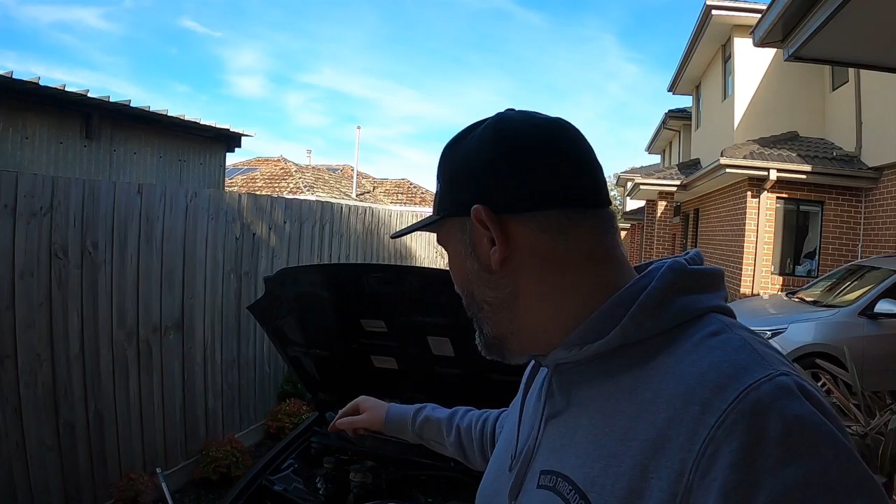Since we last saw the car, the owners had it for a whole week. We've had to bring the car back once already to do some mods, and these ones weren't good mods. We had to replace all of the fittings from the oil filter and also to the turbo because all of those cheap fittings were leaking. I'm going to show you what we did with that in just a second.

The reason why we are back is because we're going to set up a missing link, or a daisy chain of fish tank filters, to cheat the map sensor. I've heard about this several times, and heaps of people have told me just chuck a few fish tank filters in there and everything will be sweet, off you go. I actually tried that, just shoved one in the line and made a bit of a link, and it didn't work. But now, after a bit more research, I know what I need to do. I looked all over YouTube, couldn't find any decent videos, so I decided to make one.

So I've got the owner back. We've already adjusted the wastegate, got it up another full turn, so that should give us another 2, maybe 3 PSI. Hopefully our target is around about 8, maybe 9. That's what we're aiming for.

Still no tune, stock injectors, stock fuel pump. We're hoping that this missing link system, or daisy chain of fish tank filters, is going to do the job. The owner has also jimmy rigged up this really cool air intake.

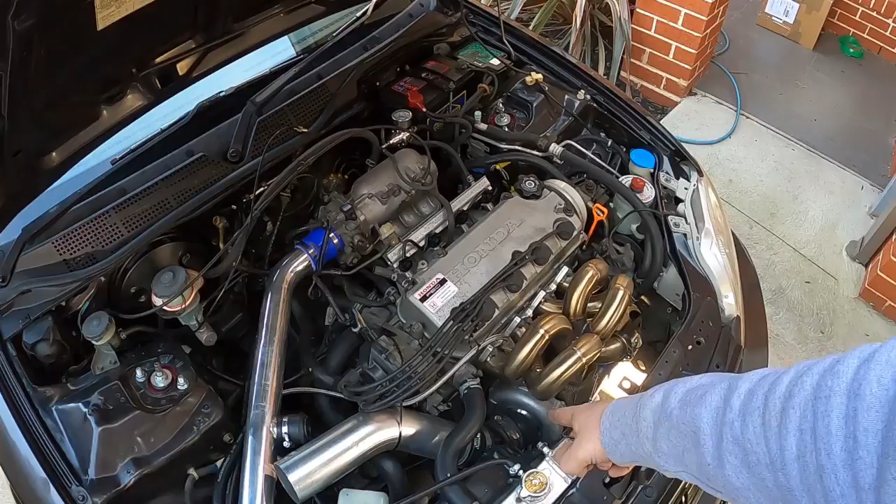As we discussed, I had to trim here and make things fit around the fan shroud, and it wasn't ideal sucking hot air straight off the radiator. The owner has put in some elbows. This is just temporary - we're going to trim this down, put a filter on there, and get another silicone elbow there soon. But just for now, we're getting some cool air from behind the headlight, which is great.

Everything else is going like a dream. So let me show you what we've got over here. Hopefully we miss all the glare and sunlight, but I've set up a little drawing here on my whiteboard.

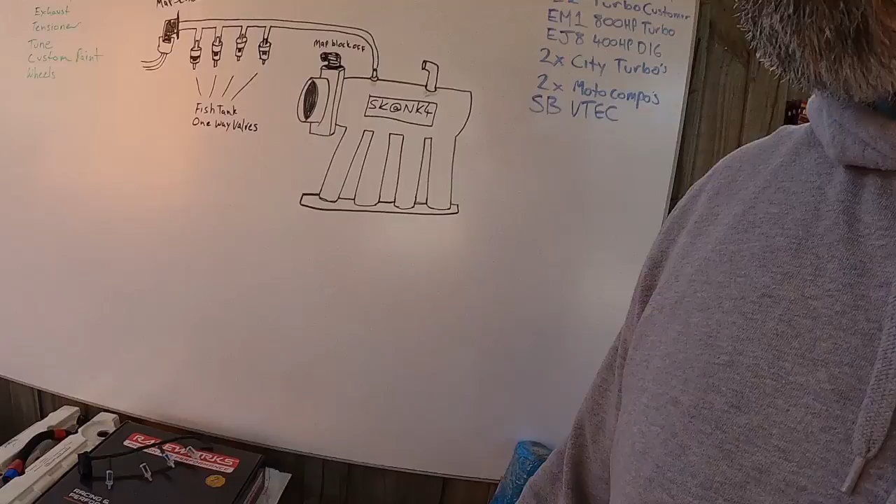Before we do that - I replaced all of the fittings. All of these China fittings were leaking. The red and black ones are the ones that came with the oil cooler setup, that we didn't end up running, but just because there was no space. We did end up using a lot of the oil lines, and every single one of those leaked. The Max Speeding rod fittings didn't leak, but we decided to change them all out for some Raceworks ones.

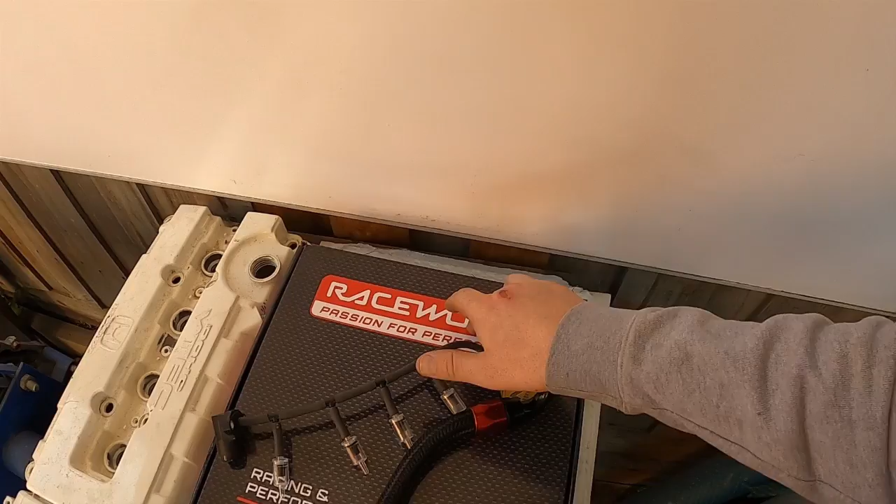They're local down here in Melbourne, so I just went and hit those up. I went with some push lock fittings, all black, nice and stealth, so I think that was the go. Don't cheap out on fittings because you'll just have to change them all anyway. Turbos is cool, intercoolers is cool - go cheap on those, but probably not on your fittings.

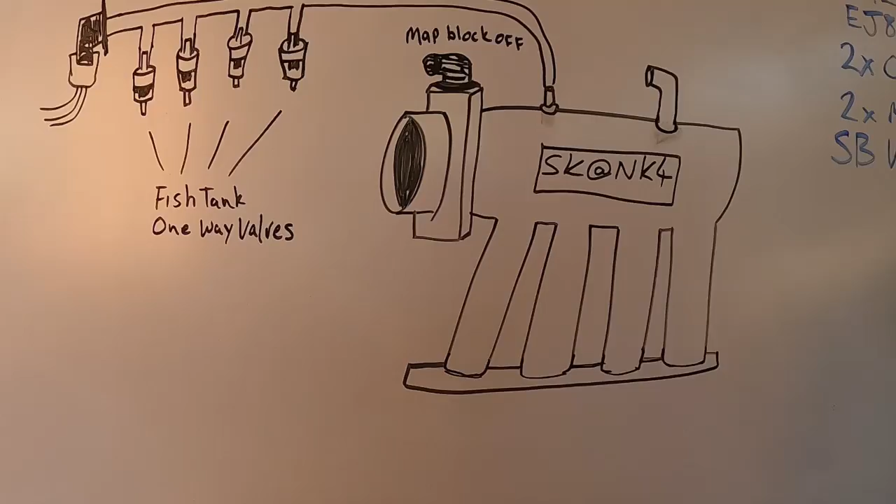Hopefully you guys can understand my drawing here. This is your intake manifold. You have tons and tons of vacuum lines coming off there - I've just drawn a couple on here. This is your brake booster line, throttle body, and your factory map sensor.

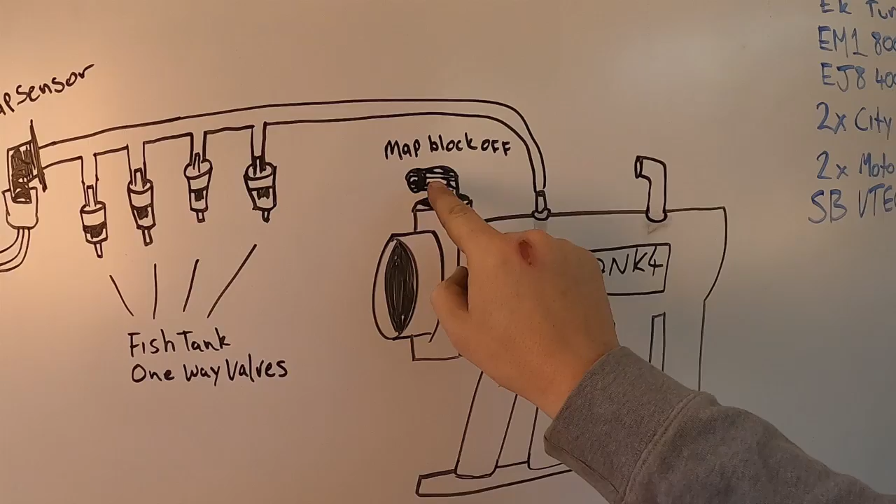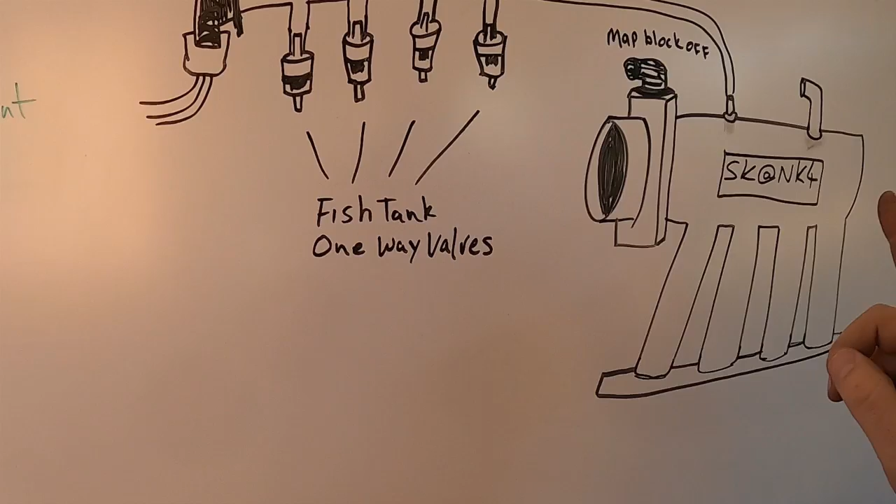What I'm told is you grab any of the extra vacuum lines and run a link off there with around about 4 of these fish tank filters. They're a one-way valve, so when the car's on vacuum, they're all sucked shut, so there's no leakage. The car won't stall, in theory, which we're going to test.

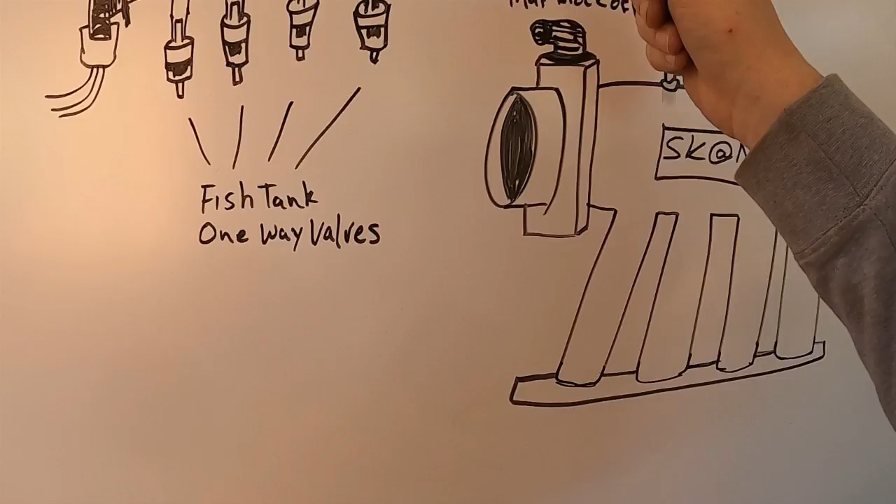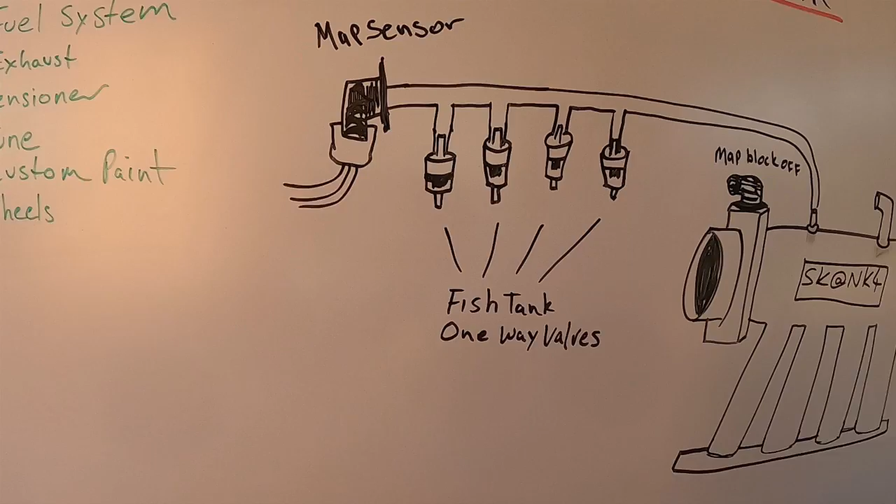Then under boost, the boosted air comes in here, fills up the plenum, and then any excess is going to push out through here to go talk to the map sensor. On the way past, it's going to bleed out some of this extra boosted air. Hopefully by the time it gets to the map sensor, we're reading very little to no boost, and everything stays fine - no engine lights, the car doesn't break up, and we keep running smooth and sweetly.

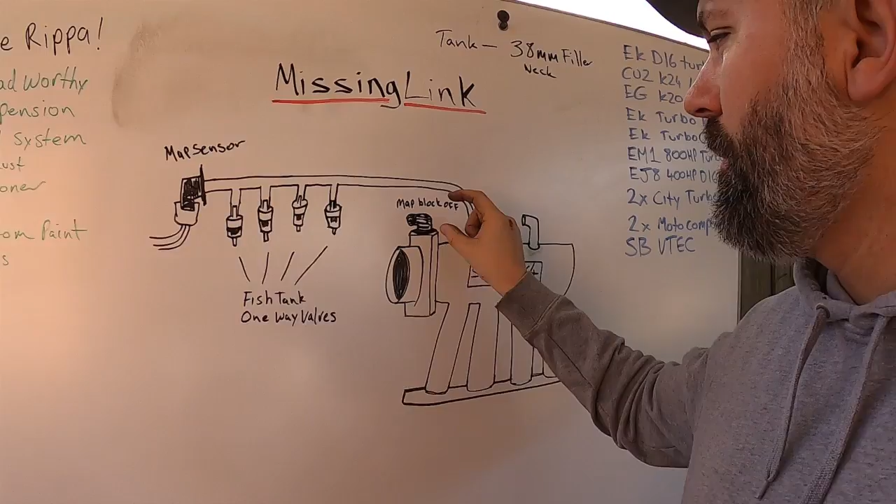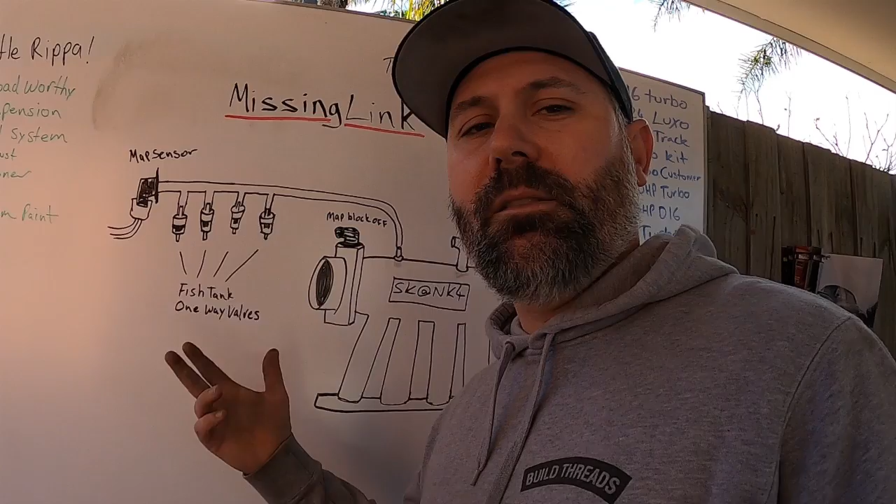Now there is a device you can buy called a missing link. Basically it's a spacer that goes between your factory map sensor here - it's really nice and neat. Those cost around $100, whereas these cost around $5, so that's a no-brainer, at least to give it a try. This is what it looks like once you're done - a vacuum line off the plenum, your one-way valves, and then your map sensor. So we're going to go and install that on the car.

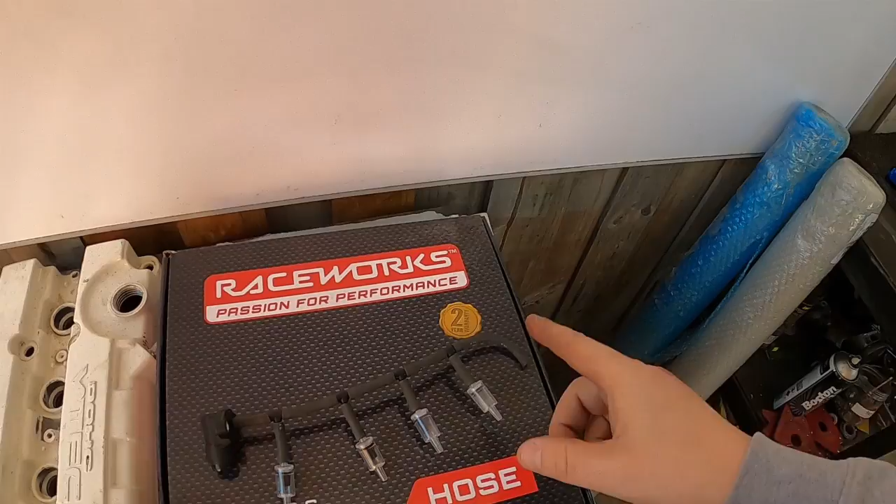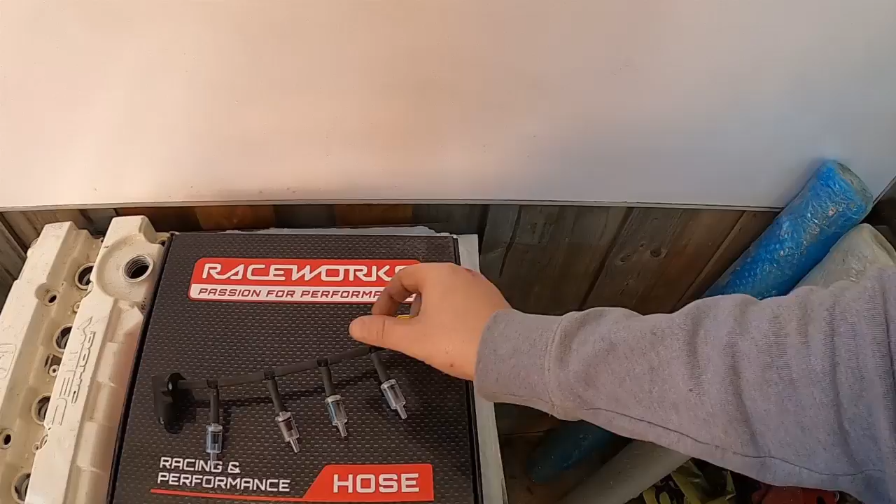Should be really simple, just a matter of unplugging the map sensor that's there and plugging into this spare one that I have, or you could make a blanking plate and just blank that off, and then simply plug that in, and off you go.

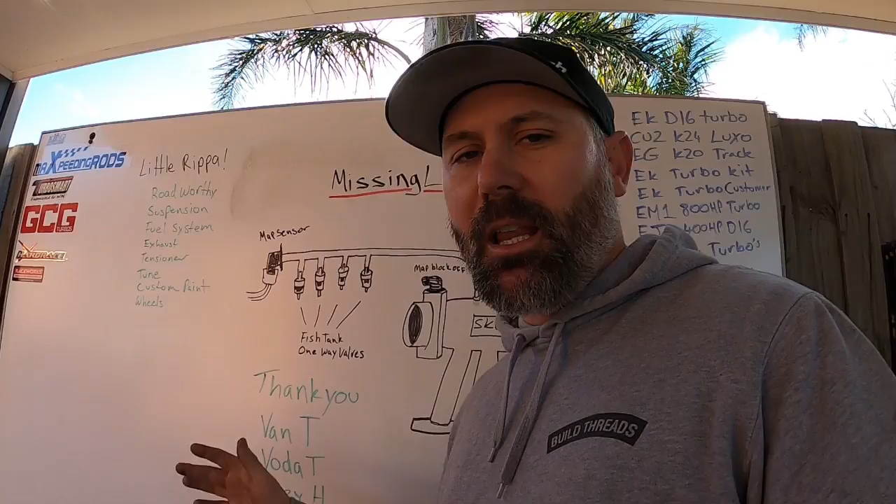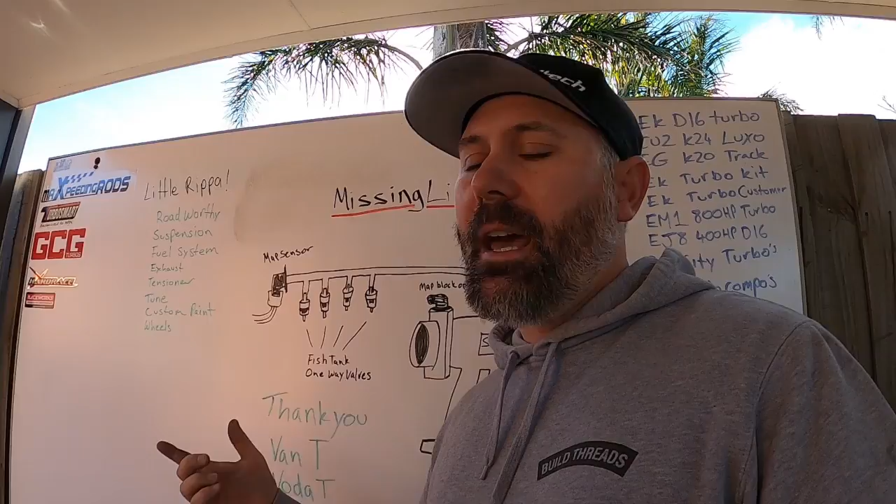Between the three guys, we got some great tips. I actually learnt that Evo 4, 5, 6, 7, 8, 9, and 10 injectors, according to these guys, clip in and run fine on the factory ECU and all the factory plugs. That's something I need to investigate myself, but I'll take their word for it because they've been good with all the other info in the past.

So that'll help you go from a 190cc injector to a 410, I think they said they were. That's perfect for what we're doing.

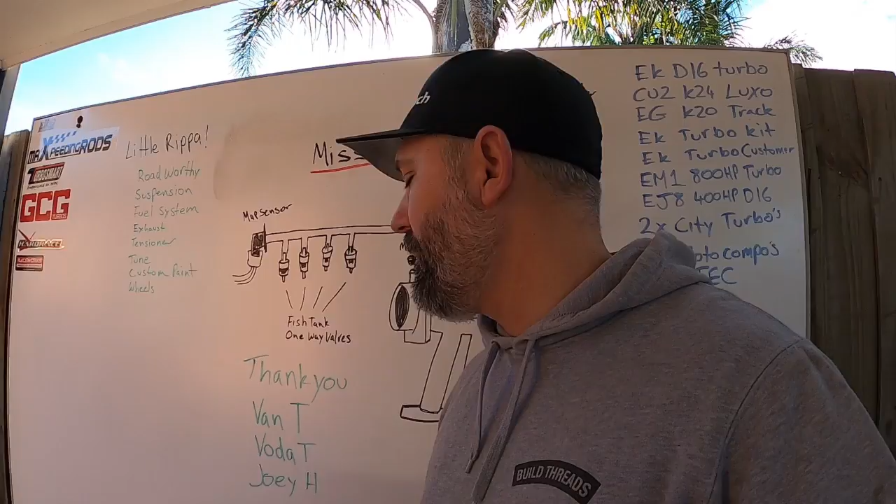All three of these guys said that they are running the missing link setup just like this, and around about 9 or 10 PSI on their cars with no tune. Everything's all factory. One of the guys upgraded to Evo injectors, so 410cc injectors.

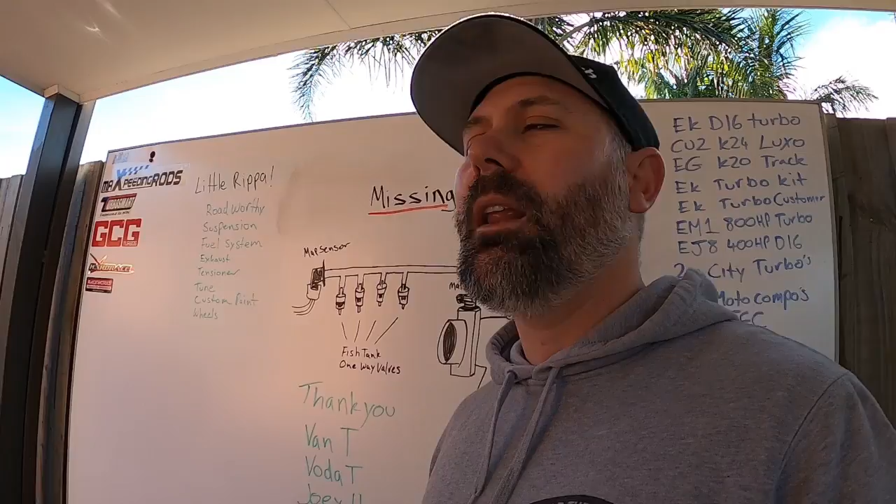I believe one of the guys also put in an Apexi SAFC, and that is Super Air Fuel Controller. So that can just tell the injectors to put more fuel in versus the air fuel ratio and the RPM. Pretty good little cheat.

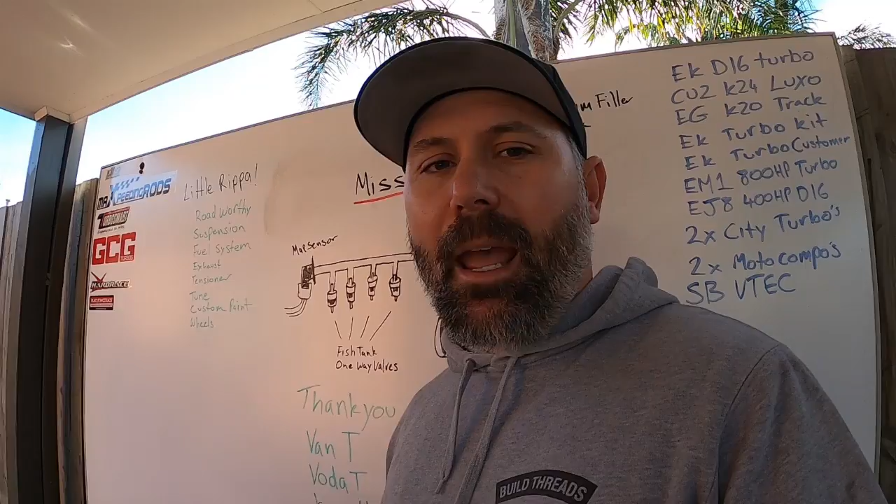They're still not cheap. Last time I bought one of those was about $600 a couple of years ago, and then you've got to get it installed and tuned. Maybe if you can pick one up secondhand cheap, might be a good budget option. However, if you're going to go $600, you may as well go $1,000, and you may as well do an ECU upgrade and totally program everything.

I don't know, that's just my 2 cents, but let's go over to the car and we're going to set this up now.

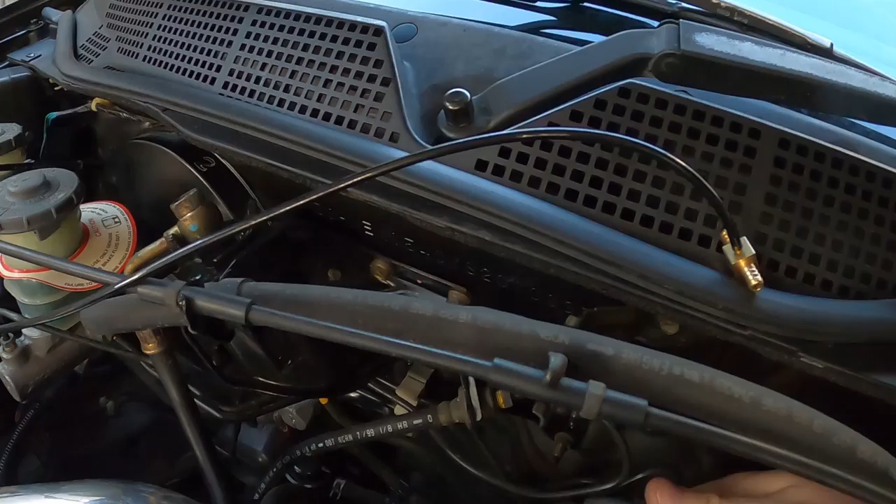Really simple, so it's just going to be a matter of reaching back down here, plugging that into a vacuum line, pressing that down, and we'll cable tie this all up soon, but we'll just leave this here for now. Then unplug the factory map sensor, plug it into the other one. Sorry about the camera angles, doing that with one hand.

We're going to go take it for a drive now and check out what sort of boost it makes and how the car drives. Hopefully that's problem solved.

Alright, so first test, we've given it a little tiny squirt so far and hit 5 PSI and held, so that was good, no breakup. Now we're going onto the freeway again, second gear. It's pulling very strong, but we're not really getting more than 5 PSI yet.

I don't know why that is. It could be because maybe it's bleeding air out, I don't know, but yeah, very strange. It's definitely going harder, and it runs smoother, so that's a good thing.

So we're in 4th gear, it's running about 3 PSI now. Obviously the turbo is not spinning as fast, but yeah, goes strong, goes good, pulls well.

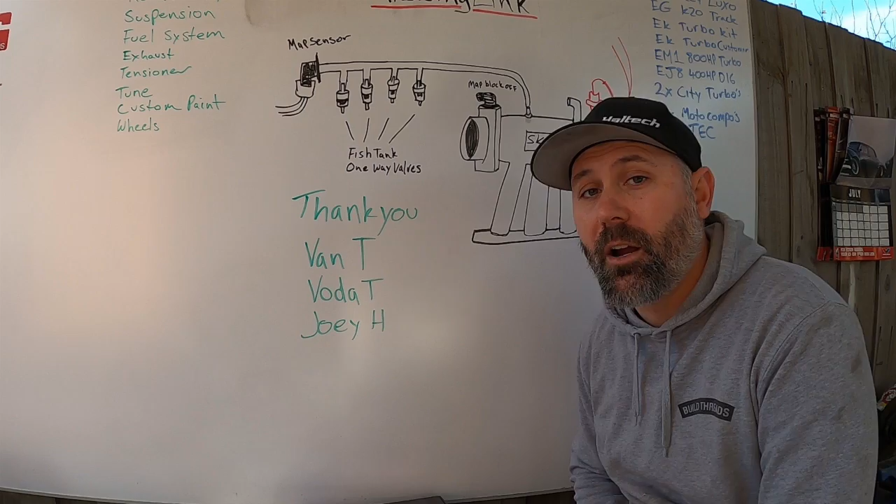Now, I did gap the spark plugs down to 0.8, which helps. But what I did is I ended up taking another vacuum line from here that was going onto my fuel pressure reg, and I put a T-piece in the line, and that's where I ran my boost gauge. Vacuum line through here, and then that goes off to my fuel pressure reg. What do they look like? They look like that. So that's where I got the vacuum signal from, and we're actually running 8 PSI comfortably now with no tune. That worked out really, really well.

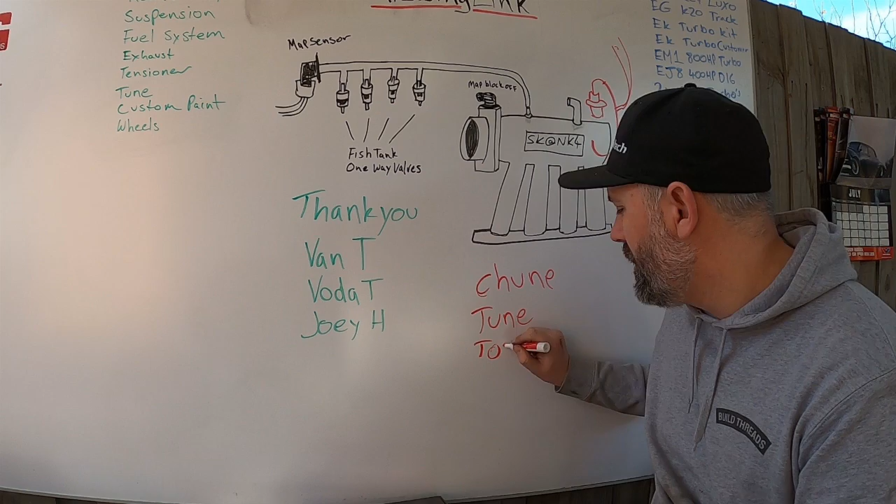Now I get pulled up a little bit for saying tune. In Australia we call it a chune, we actually spell it 'tune,' but in America people say toon. So, Australia chune, America toon, we know what we're talking about.

Thanks again to the guys that reached out to me on Facebook: Van, Voda and Joey. Awesome dudes. I've met Joey, he's got a Stagea and I'm gonna catch up with him soon, hopefully see where the Stagea is at, because I really want to grab me one of those.